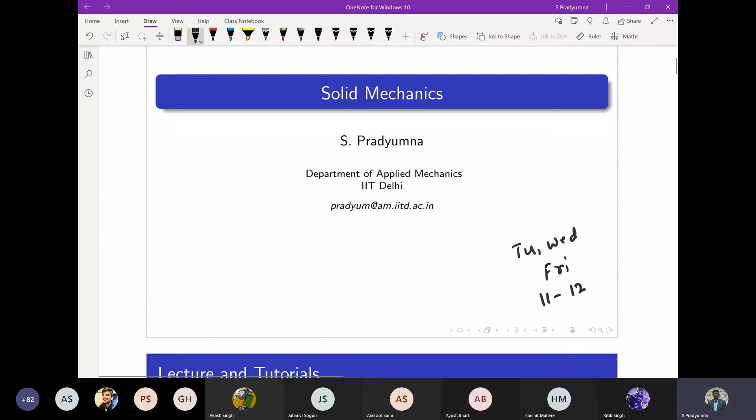Myself, Pradyumna from Department of Applied Mechanics, IIT Delhi. We'll have the lectures every Tuesday, Wednesday, Friday from 11 to 12 in the morning, right? And all the classes will be conducted in MS Teams, and the recorded videos of all the lectures and the lecture notes are also made available in the MS Teams app itself.

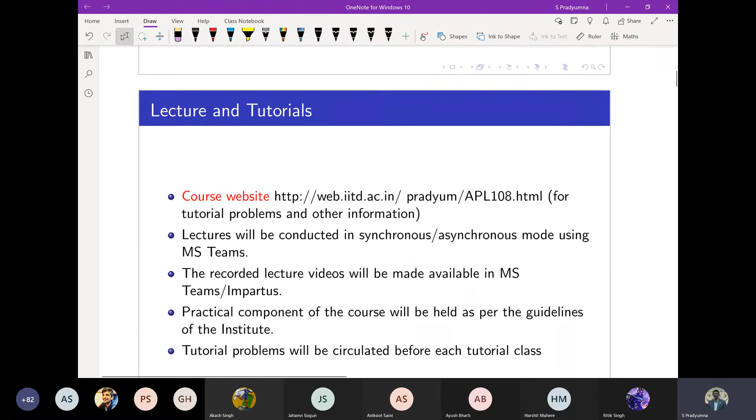Okay. So there is a course website in the Applied Mechanics department; go to my web page, or you can directly click this website for other information like how to get the tutorial problems and instructions regarding the course. It's already active right now. Also, you can access that. And moreover, I will be uploading these tutorial sheets and other instructions in MS Teams also directly. So you can access these tutorial sheets and any other material in MS Teams itself.

So as I told before, we conduct the lectures in either synchronous or asynchronous mode using MS Teams. When it is conducted in asynchronous mode, I will put the recorded video in the MS Teams app, and then we can have some live discussion sessions like problem solving or doubt clearing sessions if there are any doubts from you all coming in advance, so that we can discuss, and then you can ask any doubt you have. So we can conduct a live doubt clearing session if there is any need for such a session.

So the recorded videos will be available in MS Teams. Maybe Impartus can also, I can try. The practical component of the course, we have to discuss whether to go for online mode or wait for institute guidelines. And I will circulate all the tutorial problems for that particular week before each tutorial class, and they will be available either in my web page or in the MS Teams app. So these problems you need to solve, and then you can come back.

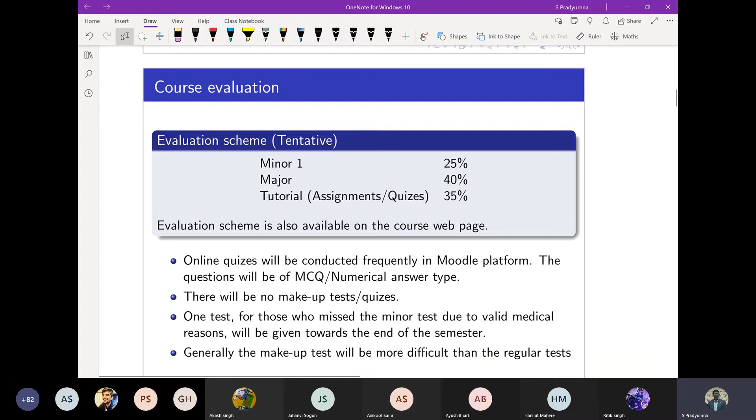I'll come to the course evaluation. In the course evaluation, this is the tentative scheme. We have one minor, and the weightage for that is 25%, and major has 40%. This has a tutorial component also. We have assignments or quizzes which carry about 35% weightage. Okay, we will have online quizzes very frequently in the Moodle platform. These quizzes may be every week or every alternate week. That depends on the topic. We'll conduct the quiz, or there may be surprise quizzes as well.

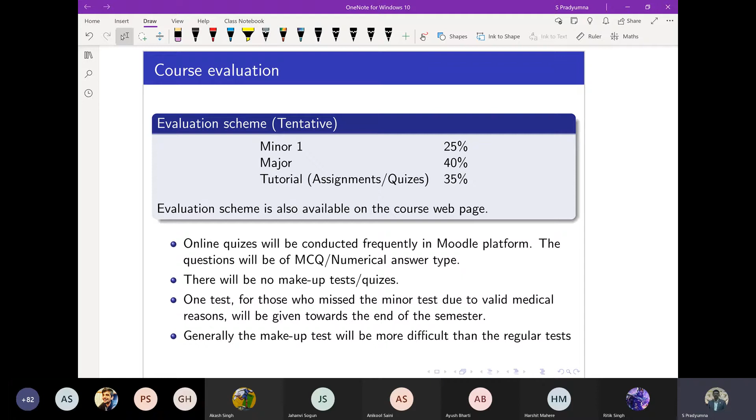So the type of questions in this quiz will be either MCQ or a small answer, like you just have to enter the number, numerical answer type question. So I assume that the data for different students will be different in this case. And there will be no makeup tests or quizzes. So if you miss a quiz, then you cannot have any makeup quiz. If you miss the minor test in case of any medical emergency or valid medical reason, there will be one makeup minor given towards the end of this semester. We usually have the whole syllabus for the makeup minor. Therefore, this test will be more difficult than the regular tests because the syllabus is huge, right?

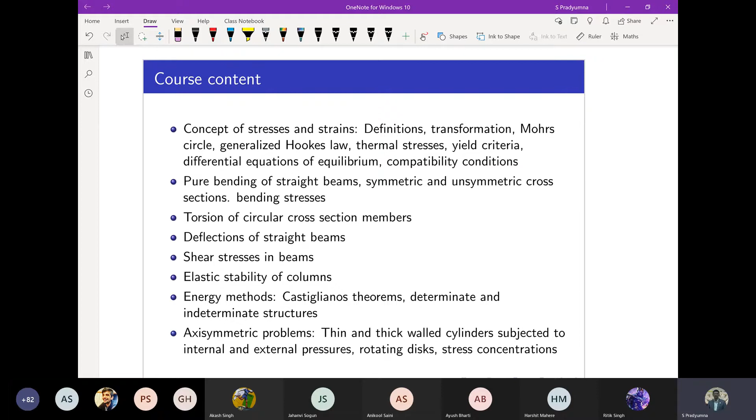I'll come to the course content. In the course content, we start with concept of stresses and strains, definitions, transformation of stress, Mohr's circle, generalized Hooke's law, thermal stresses, yield criteria, differential equation of equilibrium, and compatibility equations. Basically, we are discussing the behavior of any body or any material under different types of loading. Now, why do we study, what do we study in this course?

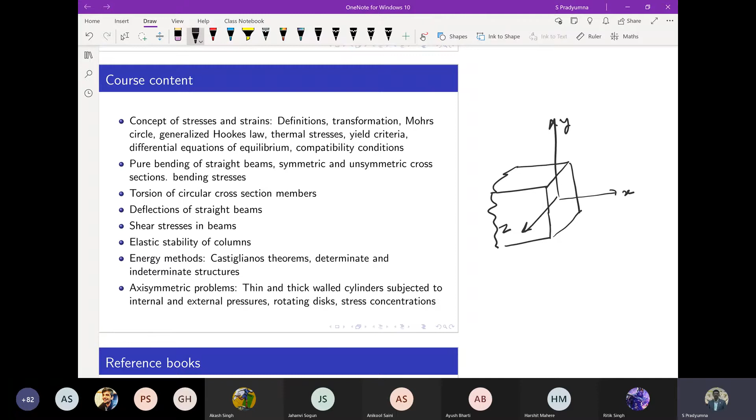To be told in brief, for example, let me consider a simple structure like this. You may assume it as a beam or any structural component. So let us assume that this is the x-axis, this is the y-axis, and this is the z-axis. Okay, and I apply a load like this at certain point P, and assume that this distance is B from here to here, and from here to here it is equal to A. Okay.

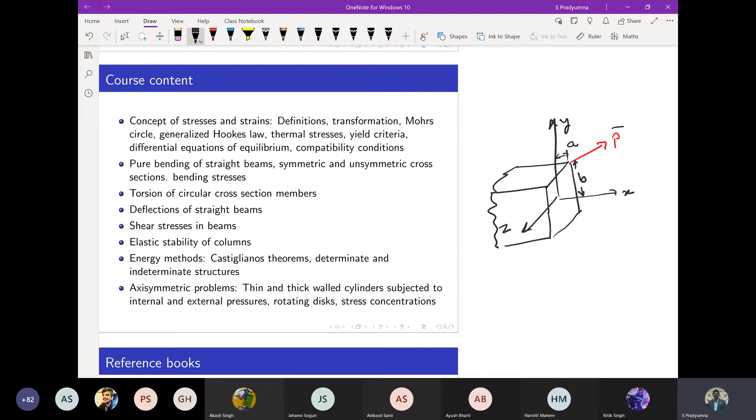So this load P, you can say it's a vector, and I want to know the effect of this load on the body. So what I can do is I can just consider that this load is transferred here. So with x component, that is Px, I can have Py, and I can have Pz. So I can shift this P to the centroid of this cross section.

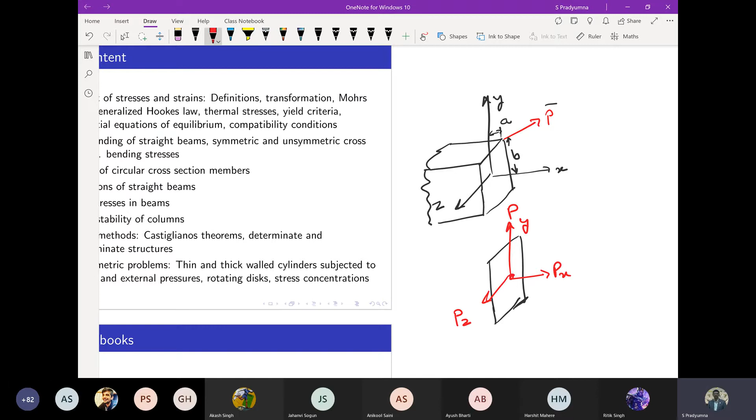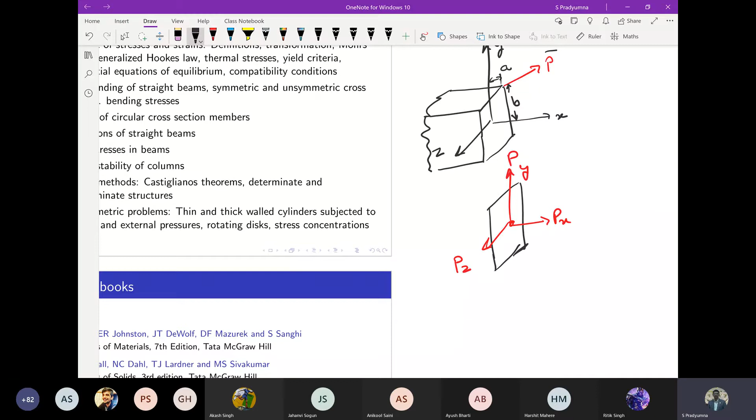Okay. So that's not the only way I can do it, right? I need to consider the effect of the moment also when I shift this. So there will be certain moments which I need to consider. So if I come to this x-axis, y-axis, and z-axis, I will have, for example, this is Mx, this is My, and this is Mz. So these moments actually create different actions in the body that I need to consider.

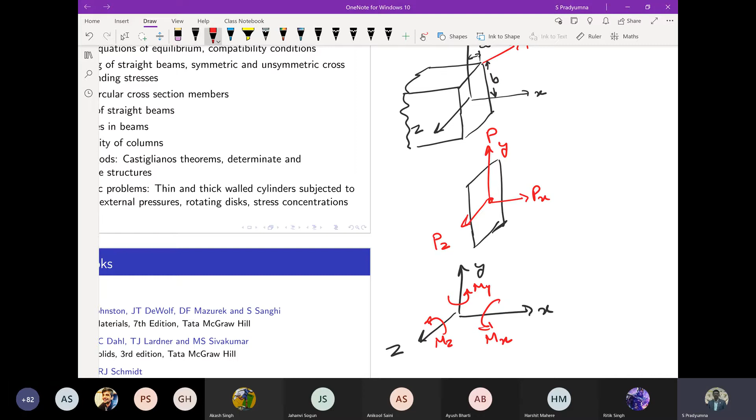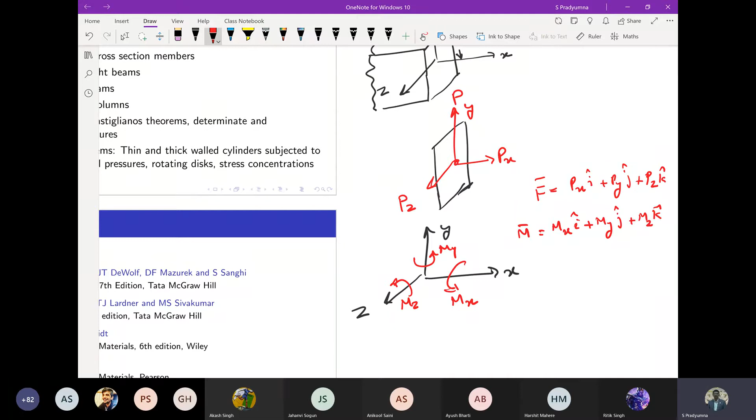So that means I have the force vector Px i, Py j, and Pz k, and the moment I have is Mx i plus My j plus Mz k. So in this case, if I assume that on the body I have a moment about this axis, I call it torsion. Anything which is a moment applied about the longitudinal axis of any structure, we call torsion.

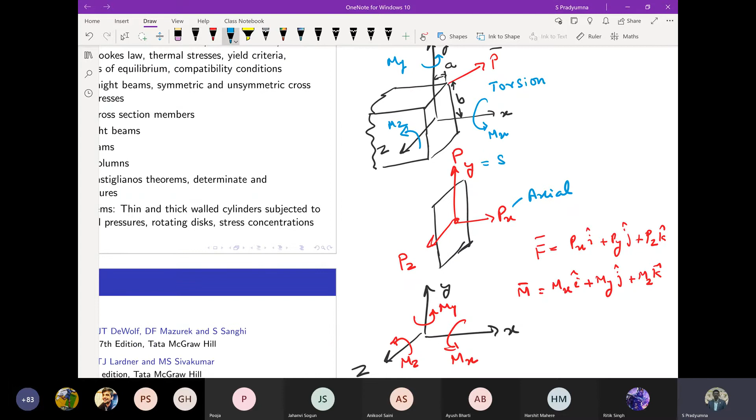Mx will create a torsion. Mz and My will create bending moment on the structural component that we are considering. So there will be bending action, there will be torsion, a twisting moment Mx, and there is axial force. This is axial force Px. There will be elongation of the body because of this longitudinally applied axial force, and these are the shear forces, Py and Pz.

So there are different actions either acting independently or in combination with each other. These are the combination of forces which we need to consider in this problem. There is torsion, bending, shear, and axial force. If this force Px is compressive, then it's compressing the body, and it may be creating buckling or some stability problem also. If you just compress something, it may crush, it may buckle, it may fail, anything may happen.

So we need to understand the action of these kinds of forces. We are considering what happens when a body is subjected to different actions of forces. We are interested in finding out the distribution of stress and the deformation because of this action. If there is torsion, there is a twist, which we call the angle of twist. There may be elongation, compression, displacement because of bending. These are the different aspects we are interested in finding out.

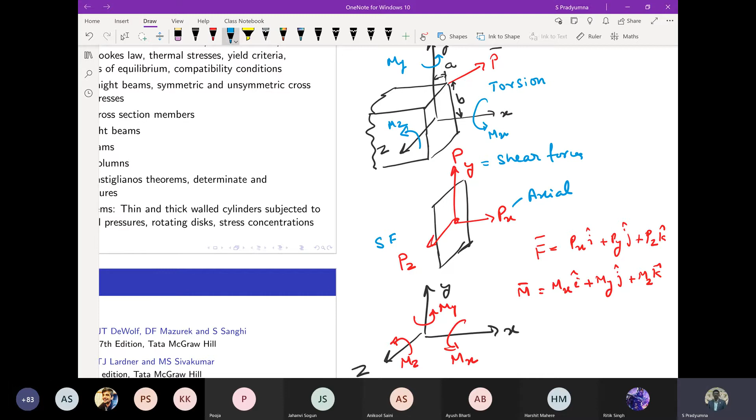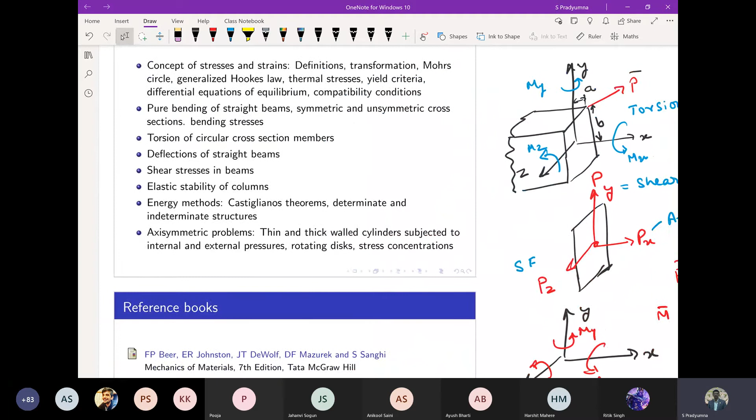Okay, so we need to understand this kind of behavior when we want to design any component which could be subjected to these types of forces. I can reduce this force into shear, axial, bending moment, and then do the analysis. That's what we do in this course. In the course content, we discuss the concept of stress. Why do we require stress? What are the definitions? We will learn this in detail.

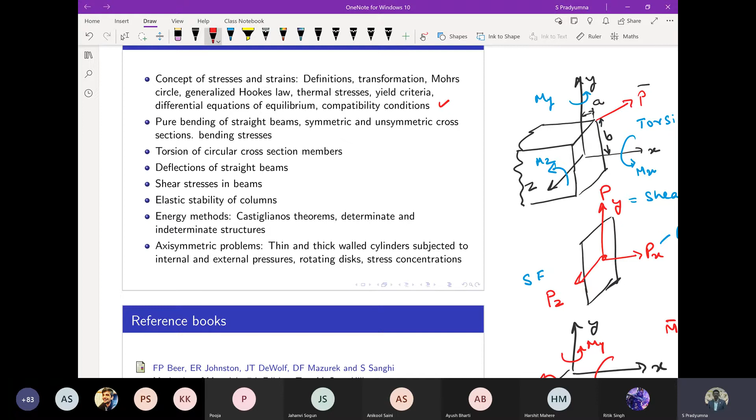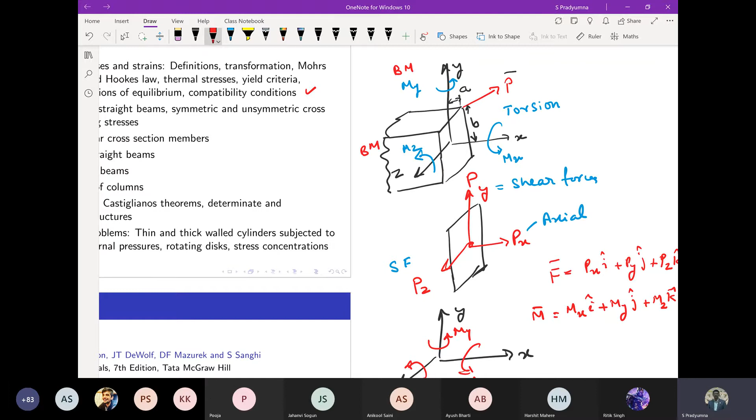Pure bending of straight beams, symmetric and unsymmetric cross sections, bending stresses. As I said before, we have bending moments: this is bending moment My, this is bending moment Mz. What happens when you have a bending moment, how the stresses vary across the cross section of the beam, we can study that. We'll discuss what pure bending is and what symmetric and unsymmetric bending are later.

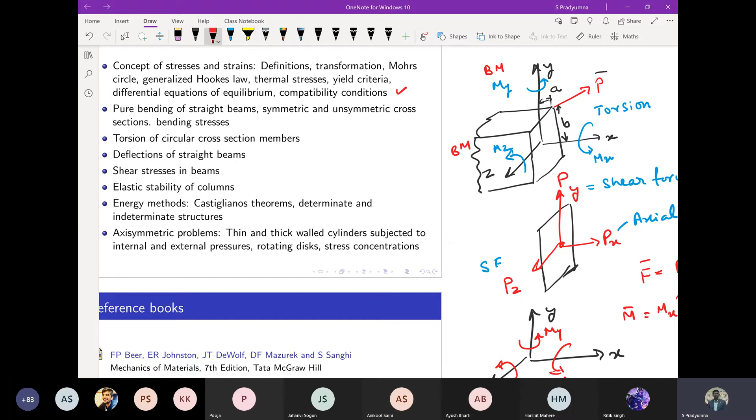Torsion of circular cross sections. The torsion is because of the twisting moment Mx acting about the longitudinal axis of the body. Because of these forces, there will be deflection, which we study for straight beams, and for curved beams as well later. And because of the shear forces Py and Pz, shear stresses could develop in the beams. The variation of the shear stresses we study later.

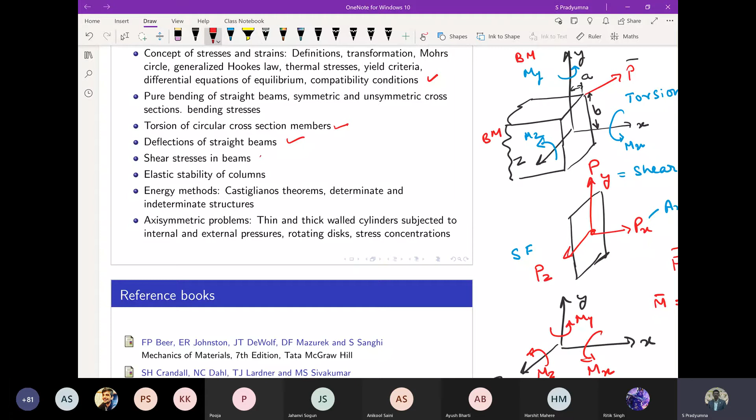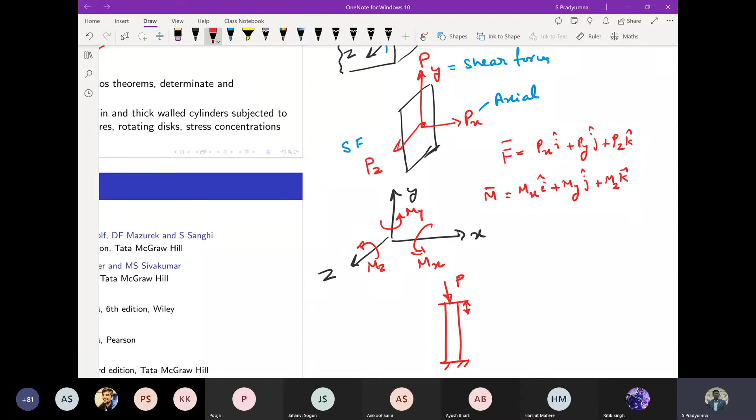Elastic stability of columns. When I have a column like this subjected to, let's say, compressive force P, it will undergo axial compression. If you keep on increasing this load P, the column may buckle. That is a stability problem, which we study in the elastic stability of columns.

And then there are some energy methods which actually help in finding out the displacement and reaction forces in determinate as well as indeterminate structures.

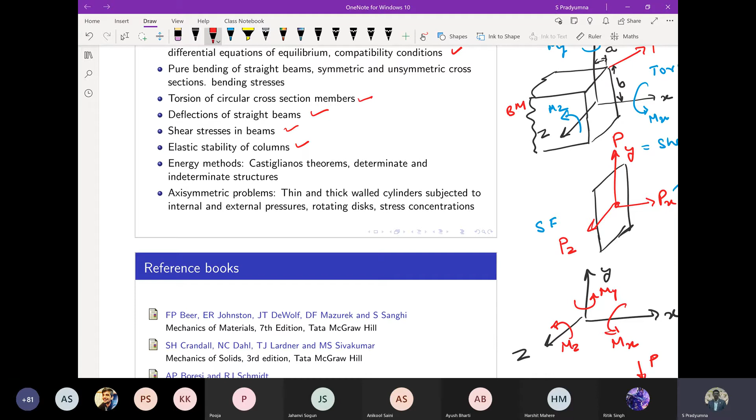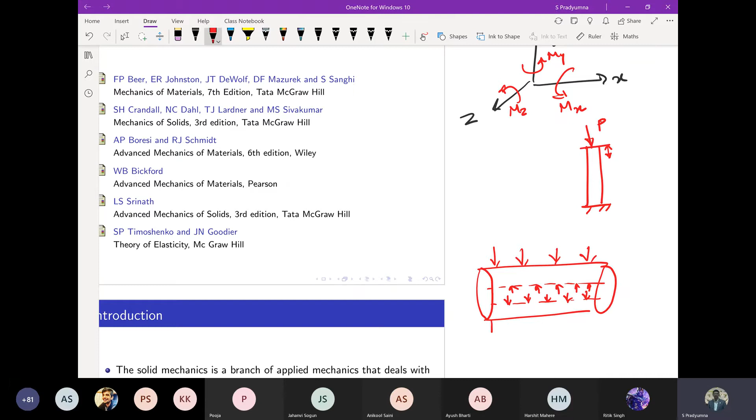And finally we go for the axisymmetric problem, where we consider thin and thick walled cylinders subjected to internal and external pressures. For example, I have a pipe like this, which is subjected to some kind of internal pressure. Maybe it is carrying a fluid, and if it is buried, then you also get external pressure.

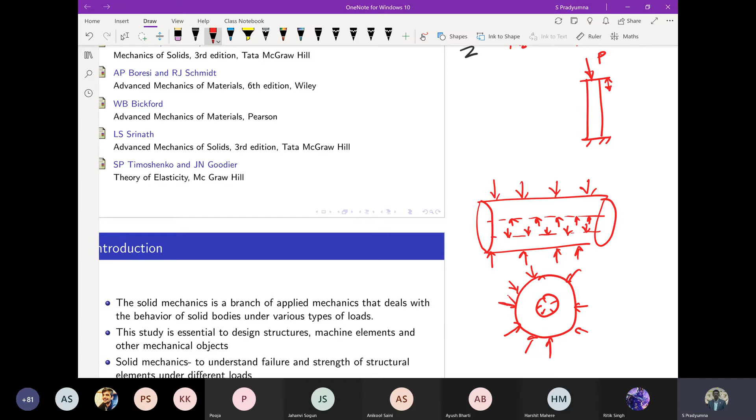So this we have to investigate. These are the type of problems we are looking at in this course - what type of stress, how the stress distribution acts on this body, and so on. This is essential in case of designing the components.

And for this we also go through yield criteria, which is the different criteria required to establish or understand the failure behavior of components under different loading actions. So this essentially is what we learn in this course, APL 108 on solid mechanics. You can call it strength of materials or mechanics of solids - this is the total content of the course.

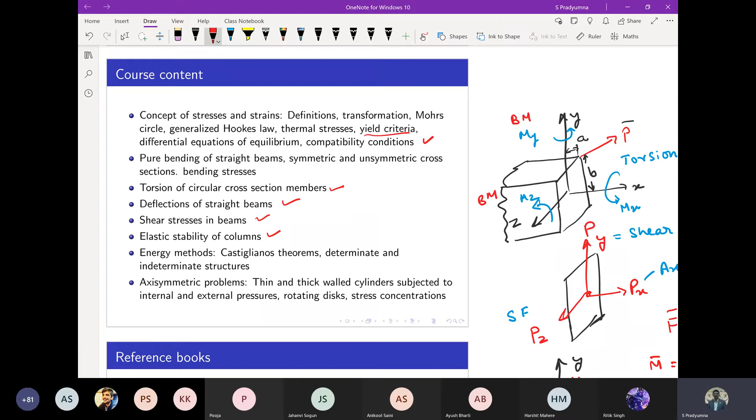So if you have any question on this content, you can ask me.

These are the reference books I follow for this course for different topics.

So initially we start with this book, and this book for the first topic, that is on the stresses, stress transformation, and so on.

For yield criteria, I take the help of this book by L.S. Srinath.

So these are the three books we generally follow right now, and for some example problems and tutorial problems, we take some topics from the Beer Johnston book. So these four are the important books required for this course. Is there any question?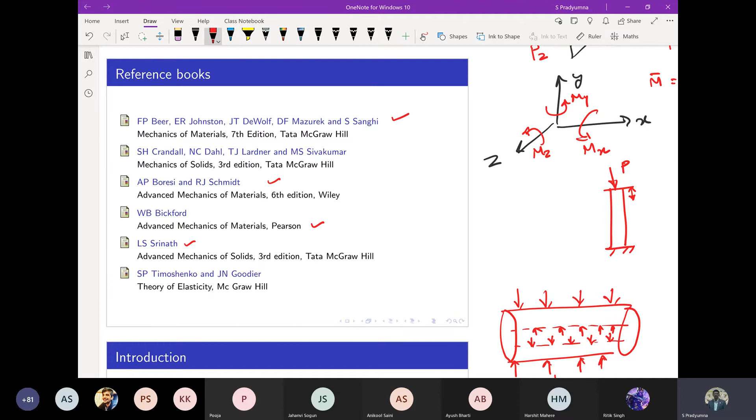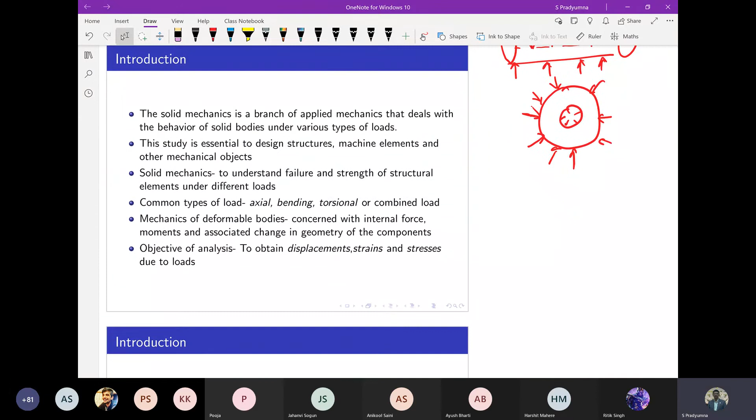Okay, so what is solid mechanics and why do we need to study it? There is a difference between the engineering mechanics you learned in the previous semester and solid mechanics. Solid mechanics is a branch of applied mechanics that deals with the behavior of solid bodies under various types of loads.

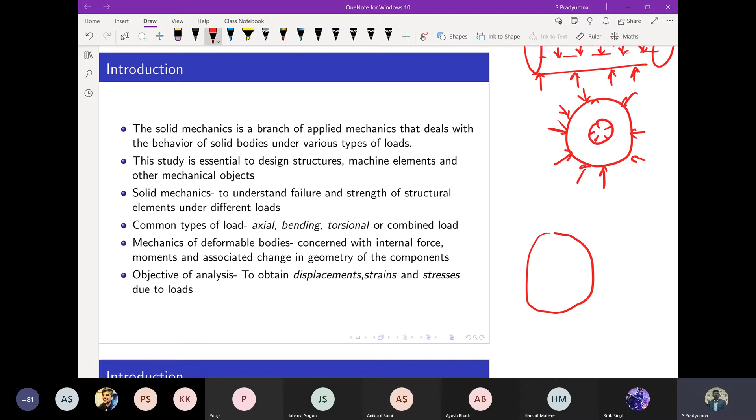The difference between engineering mechanics and solid mechanics is that in engineering mechanics you assume the body is rigid. For example, if I take this body, when it is deformed because of different loads, it may deform like this, or it may deform something else. Let me erase this. It may deform something like this - this is the deformed shape. Now how do I say it's a deformed body or a rigid body?

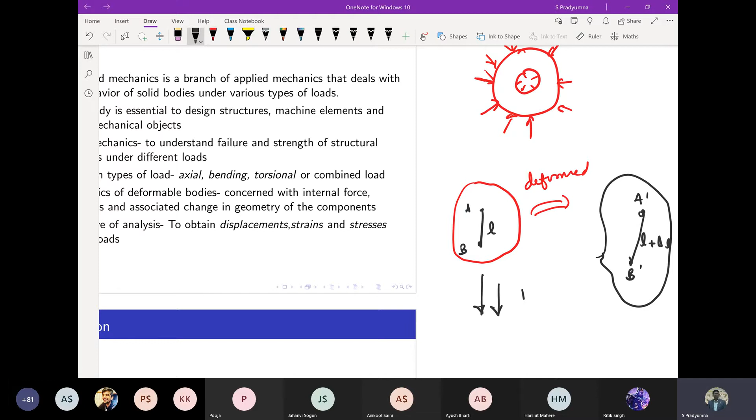If I take 2 points, point A and point B, the length of this line AB - if it changes to A dash, B dash, and if it is different from this L, maybe it becomes L plus some delta L, then you say it's a deformed body. If it remains as it is, just moves to some other location - just a translation - it goes to some other point and L remains the same, this is actually a rigid body. Or it can be a rotation also - when you just rotate this body, AB remains as it is, it's just a rigid body translation or rigid body rotation.

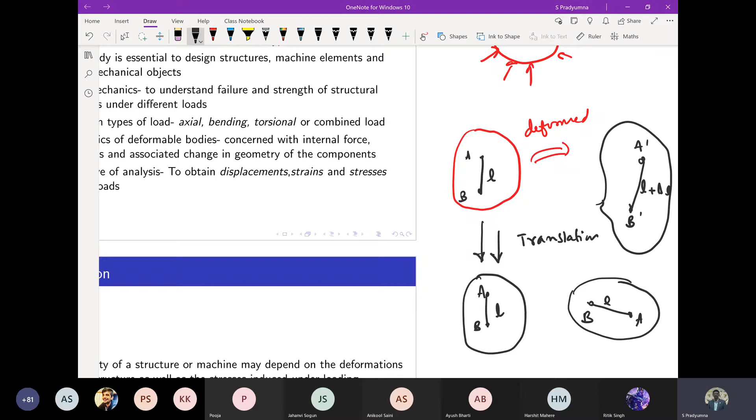So this is what we studied in engineering mechanics. But in this case, we need to consider the deformation because of the different loads applied on the body. This study is required to understand how this behaves under different types of loads. The deformation, displacements, internal forces, internal reactions, and strain are all required - this is essential to conduct the design of structures, machine elements, or any kind of mechanical objects where we apply the type of load discussed before.

So now we need to understand the failure and strength criteria of these elements under different loads - how much load it can sustain, how much displacement is safe, and so on. We have different types of load like axial load, bending load, torsion, or a combination of any of these. So we are concerned with the internal forces, bending moments, and what happens with respect to the geometry because of the force we have applied.

So that means the associated change in geometry of these components. So why do we want to do the analysis? To obtain the displacement, strain, stresses due to loads. So why do we need these kind of things? It's required to carry out the design of any structure.

We want to know, for example, if you want to design a simple rod, which can take, for example, push-ups on that rod, right? So how much strength it can take, how much load it can take, how much displacement you are allowing for that. So these are actually required in that case, right?

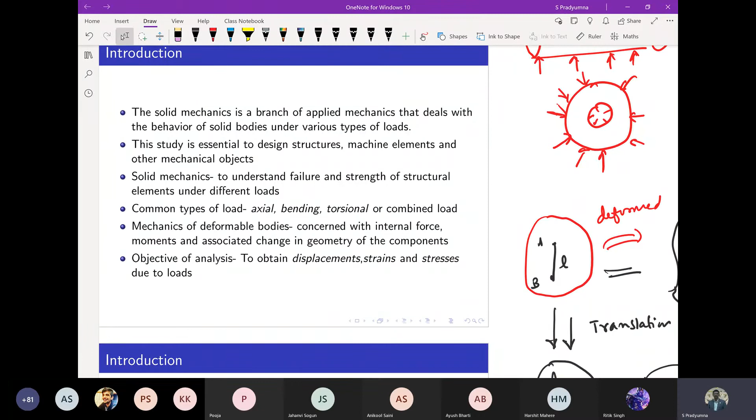So that means the magnitude of the load or the magnitude of the displacement may not be a correct criteria in order to understand the behavior or to carry out the design. I cannot just say apply 10 kg load, it will be okay, just apply 100 Newton, it will be okay. I cannot say that unless I know the stress strain behavior of the structure, the internal reaction, how much load the type of material takes. These are the details I require.

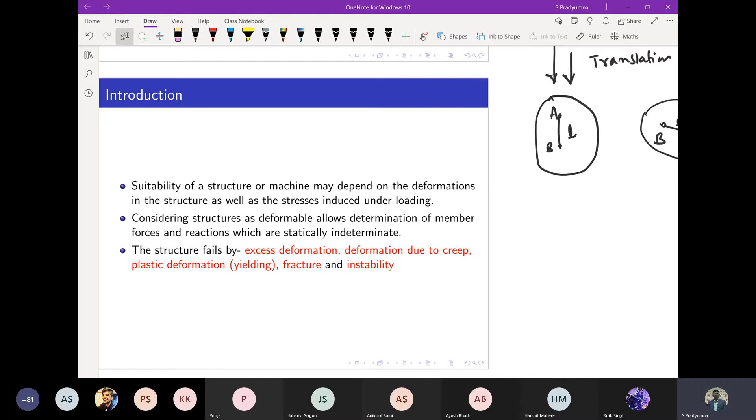That's what I'm saying, that the suitability of a structure or machine depends on the deformations as well as the stresses induced under loading. So not only the load, but what is the stress internally, how it behaves, how the reaction is there, how internally the applied force is resisted. So these are the type of details we are looking for, right?

So considering the structures as deformable allows us to determine the member forces and reactions which are statically indeterminate, right? So if you consider the structure is undergoing some kind of deformation, then the structure is not a determinate structure. So with the help of your mechanics knowledge alone, you cannot understand what is the stress, what is the kind of deformation it is undergoing.

So it's not possible to say what type of failure will create what type of deformation. For example, if it is undergoing a lot of displacement, if you take a rubber and keep on stretching it, it will undergo large deformation in the axial direction, large extension, and then it breaks suddenly, right? So every material will not behave in the similar manner.

There may be deformation due to creep. A smaller load you keep on applying for a longer duration, because of the creep, there will be large strain. So this you have to understand. There will be plastic deformation, there will be fracture, there will be instability. There are different modes of failure.

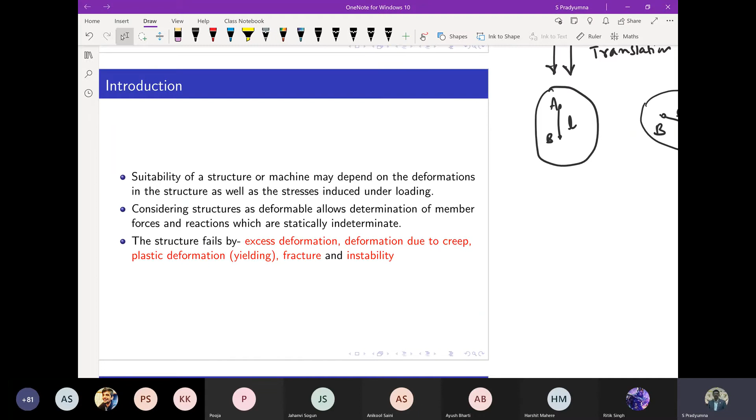To understand each type of failure, we have to understand the stress strain behavior of this material. That is what we call the constitutive behavior of the material that we should understand. That is helpful in understanding the behavior of the material. So basically we are considering the elastic material. By definition, elasticity is the property by which a body returns to its original configuration after you remove the load.

Now I can just apply, this is the variation, let's say I keep on applying in this direction, so the stress strain curve goes like this. And if I remove the load, it comes back to the original position in the same path. So it's an elastic material, right? And there is no strain after you remove the load, up to a certain limit.

This may not be true for all types of loading and all magnitudes. So you keep on increasing the load stress, then there will be change in the strain. If you remove that particular load, it comes back to its original position, so that means the material is elastic. Now, in figure B, let's say I apply the load like this, then it is not going back to its original configuration because of excessive strain. There is some strain which is actually remaining in the material itself.

When I remove the load, it comes back to zero stress like this, but there is some kind of strain which remains permanently in the material. We call this plastic deformation, so there is plastic strain because of that. Then if you again start increasing the load, it goes in another direction, and this keeps on happening. So it comes back to its original position, but there may be some strain left.

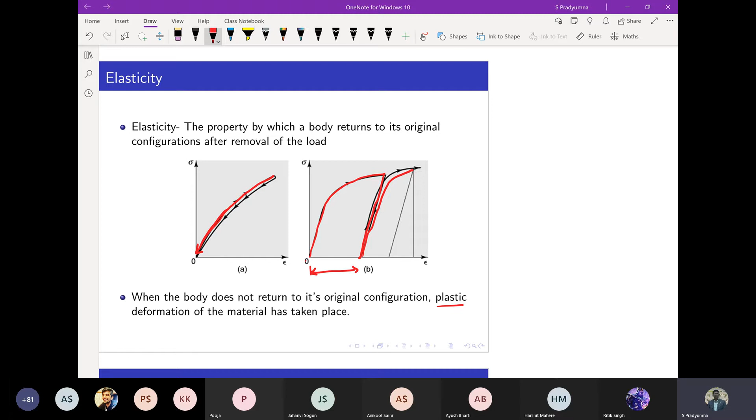For example, if I take a rubber and stretch it too much and then leave it, there will be some kind of strain, some change in the length of that particular rubber specimen I used. So these are the concepts of elasticity and plasticity which we have to understand.

There are different materials called rigid material, linearly elastic material, rigid plastic material, and so on. What happens if I take a rigid material?

For example, if I consider a piece of chalk and apply an axial load, pulling it from two directions, what happens is that there is zero strain because for smaller loads there is no extension, or negligible extension. If I keep applying a large enough force, there will be breakage of the material. There may be large stress, but there is no strain because it just breaks. If it breaks, there is no strain—it suddenly breaks, and you don't know when it is going to break. At a certain magnitude of the pull, it will break.

In the linear elastic material, as I said before, as you keep applying the load, the strain is linearly proportional to the stress—stress is linearly proportional to strain. This is the definition of Hooke's law, up to the elastic limit.

In a perfectly plastic material, as you keep applying the load and increase the intensity, the stress increases, and suddenly there is a permanent deformation—a permanent strain, a large strain after that. So we call this a perfectly plastic material. Initially it is rigid, and then suddenly the plastic behavior starts. Plastic behavior means the state of strain is not reverted back to its original configuration when you remove the load you applied.

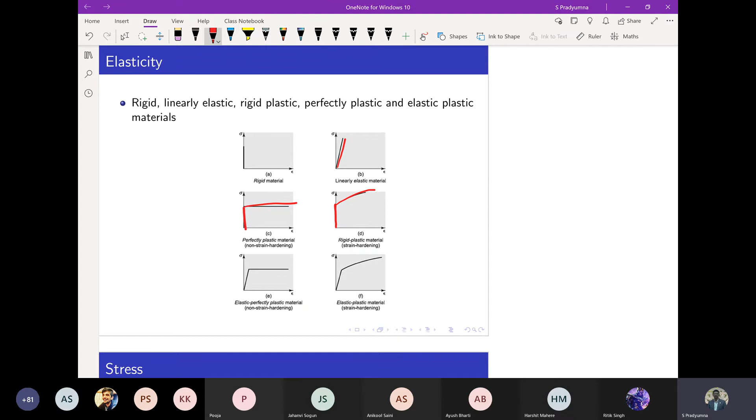There is also a rigid plastic material. Initially it's rigid up to a point, then as you keep increasing the stress, there is plastic deformation, but it's not perfectly plastic—it's rigid plastic, where there is strain hardening taking place. Each of these behaviors we should understand in detail; we'll do that later.

And there is elastic and perfectly plastic material—this is a mix where I can use the linear elastic model, and then there is a large strain because of the plastic behavior of the material. So these are the different combinations of material properties.

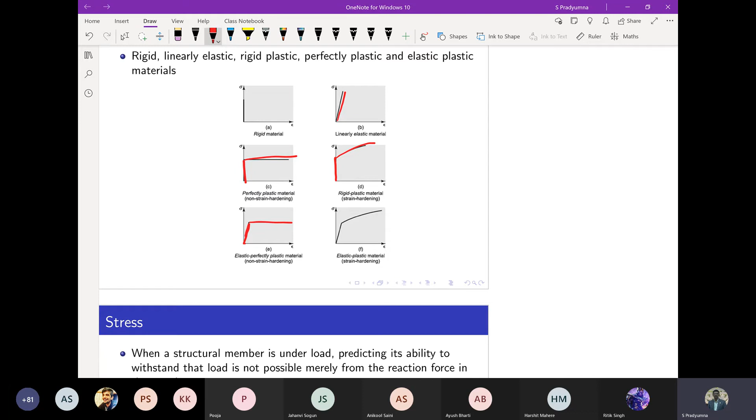There is another elastic plastic material where there is strain hardening, and there is non-strain hardening. In strain hardening, the strain is increasing and the stress is also increasing. In non-strain hardening, the strain just increases without change in the stress—for the same amount of stress applied, the strain keeps increasing rapidly. In strain hardening, there is an interaction between stress and strain—that's the meaning of this.

Now I come to the state of stress. So I said that the load is not a parameter, and the displacement is also not a parameter in carrying out the design or to understand the behavior of the material. When a structural member is under any type of load, you cannot predict its ability to withstand that load.

So whether it takes 10 kilonewton load or 100 kilonewton load, for that material we don't know. It's not possible just by considering the reaction force. The reaction force is actually calculated by considering the body as a rigid body, and then you conduct the analysis to find out the reaction forces. You do not consider the internal deformations when you find out the reaction forces. Did you consider that in mechanics when you were calculating reaction forces, drawing the shear force bending moment diagram? You did not do that, right? So it's not possible just by the prediction of any reaction force, because that just comes from rigid body mechanics.

Let's consider this body. This is subjected to different forces acting on the body. P1, P2, P3, P4 are the point forces, and this P is the distributed force. Let's assume that this is fixed to some point, otherwise it's just a rigid body translation or rigid body motion. Now this body is subjected to so many forces. I take a section like this. This is portion 1 and this is portion 2. If I cut this body, this is portion 1.

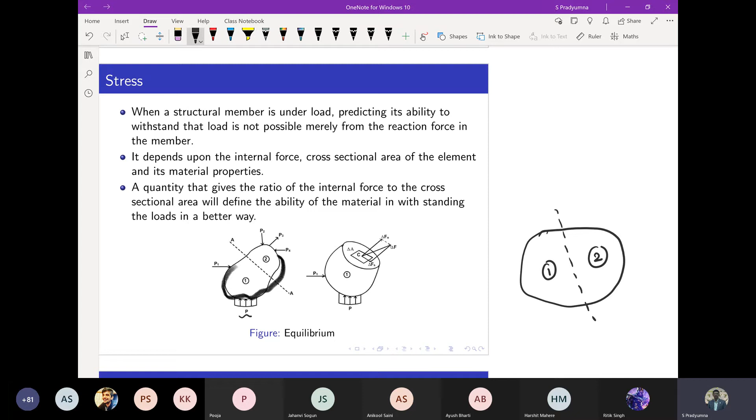Now what happens is that at this point, let's say I assume a delta A, a small area. There are lots of forces acting on this. This is actually the force exerted by body 1 onto body 2, onto the other surface. The other surface, this is from body 2. So this also will have an equal and opposite interaction, that is from Newton's law, equal and opposite reaction. Now this is actually a distributed force on this area.

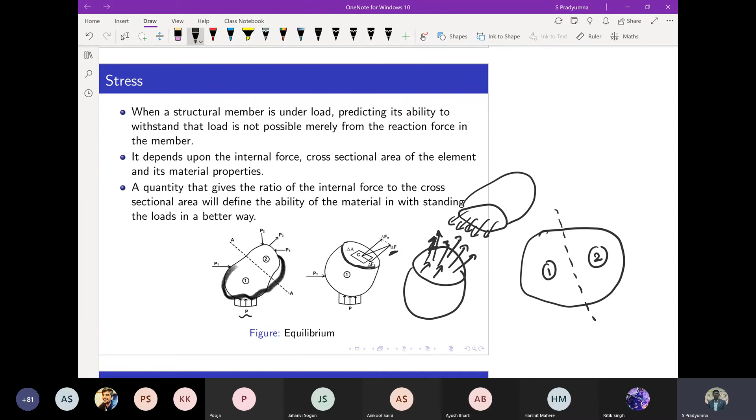Now I want to consider a small area delta A on which I have forces acting on this body. So delta F is what I consider as the resultant of the forces. So here delta F is the resultant force acting on that particular area delta A.

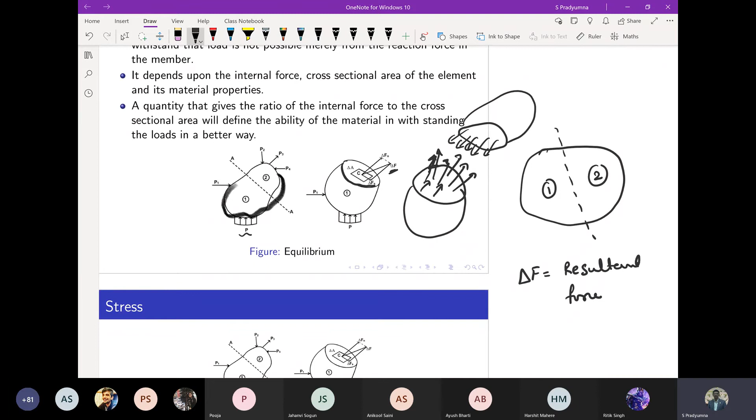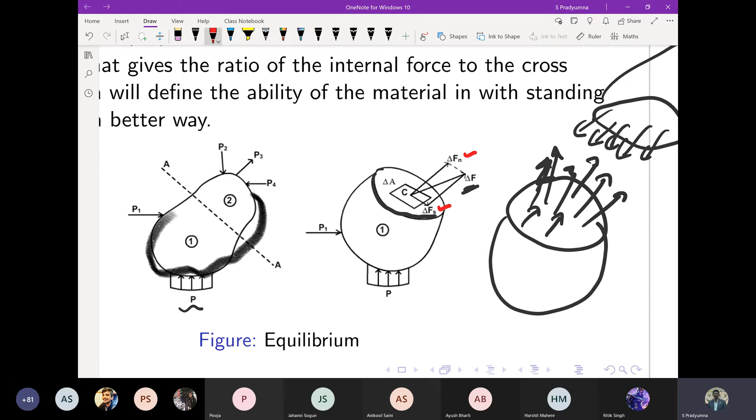Now I can also say that there is delta Fn, this one. This is actually normal to the surface we have considered, and this delta Fs is tangential to the surface. So normal and tangential components of these forces, that is when you resolve this delta F, the resultant force, into the normal and tangential components, that is delta Fn and delta Fs. So this is the resultant force acting on that particular point C.

Now let's say at point C I want to know the intensity of that force. So I just limit the delta A to 0 like this. So this delta F is the resultant, and if I limit this delta A to 0, I get this is the stress sigma. The force divided by the area is actually stress. If I limit this delta A to 0, we call this the stress at a point.

There may be different number of components of stress. That's a different issue, and we will do that later. So sigma is the stress at a point when I limit the delta A to 0. Are you understanding? So this is also called a term which we call it as

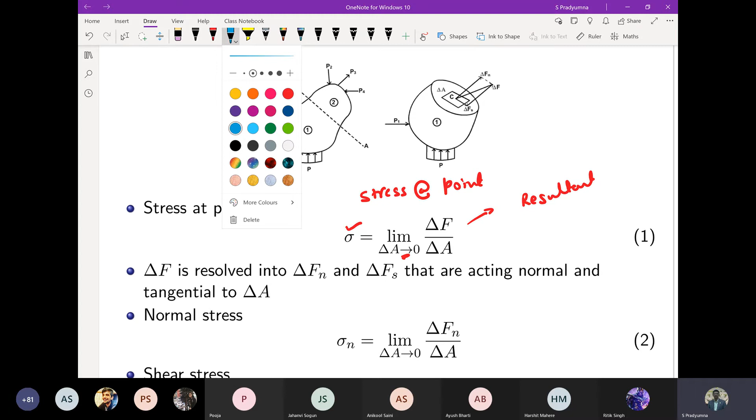traction. This we call it as a traction, this is a traction force. So delta F is a traction force, and sigma is actually the stress at a point, because this may not be acting normal to the surface. It depends on the intensity of forces, the direction of the applied forces, and so on. So this delta F is actually the traction. This may not, in general, be normal to the surface.

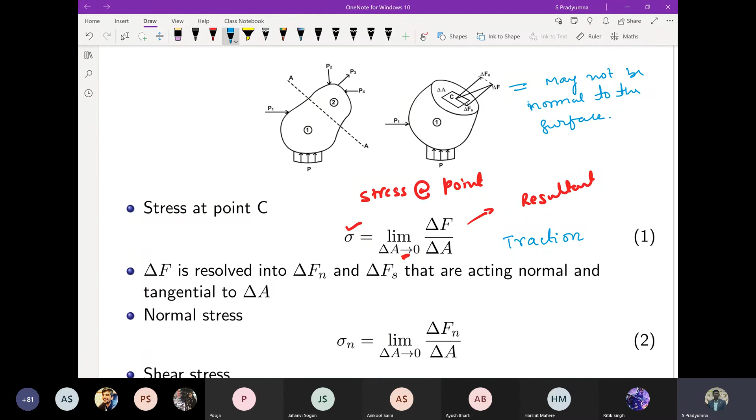So the normal component is delta Fn, and that is what we call delta F. The traction force is resolved into the normal component delta Fn and the tangential component delta Fs, acting normal and tangential to delta A. So if I want to get the normal stress at that particular point, sigma n, I take delta Fn divided by delta A, and put the limit on delta A to 0. So this is what we call normal stress, acting normal to the surface we are considering.

There is also a shear stress, which is because of the force acting tangential to the area delta A. So this is the shear stress, sigma s. These are the two components acting at that particular point. Then you can consider different orientations and so on.

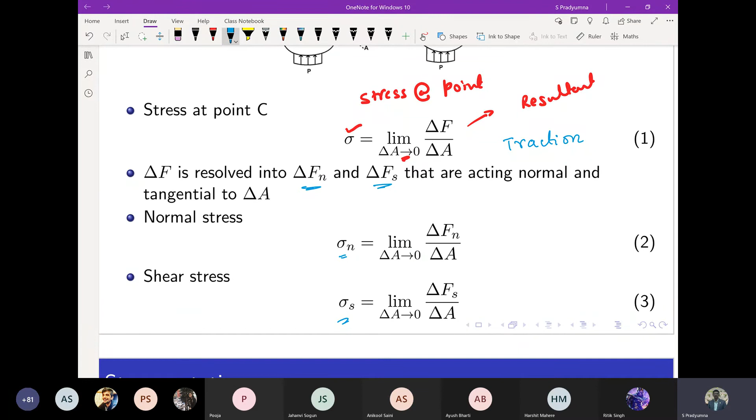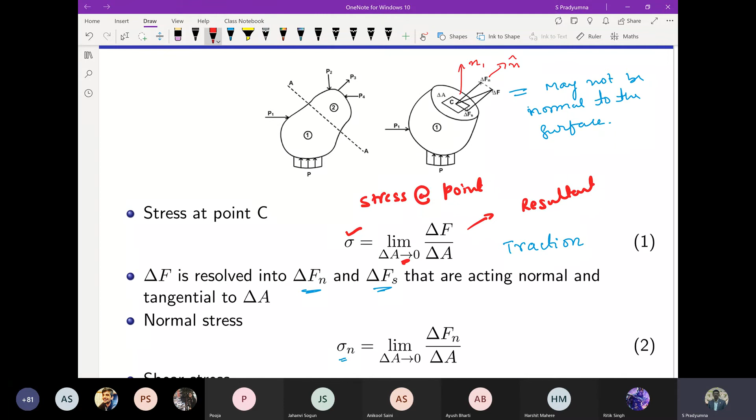Now the question is, if I change this plane to some other plane, instead of considering this n cap direction as the unit vector normal to the surface we are considering, if I take another n1 cap as the unit normal, then what happens? Will this sigma n and sigma s be the same, or will they be different? Are you getting the point?

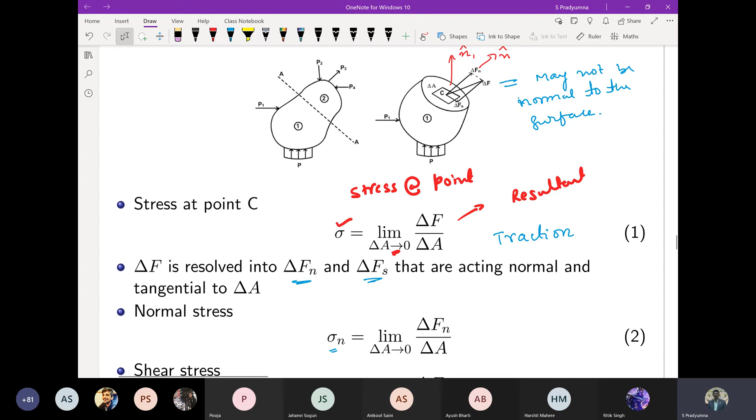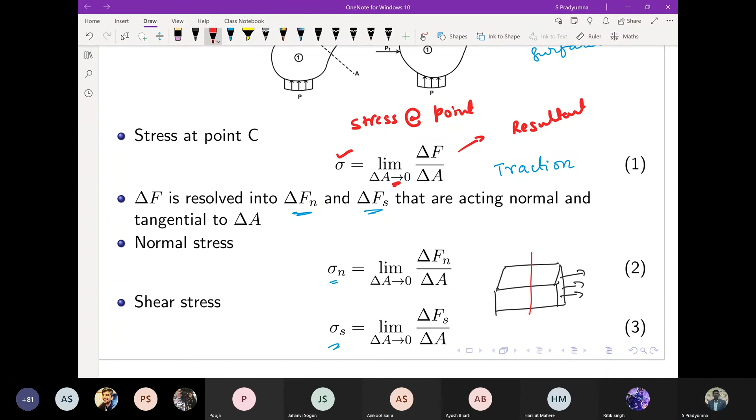So for example, if this is the body, and these are the forces we are applying, now let's say I consider this section. So that means this is the kind of thing we are looking at. This is the normal stress, and this is the n. Now let's say I take the section in a different orientation, like this.

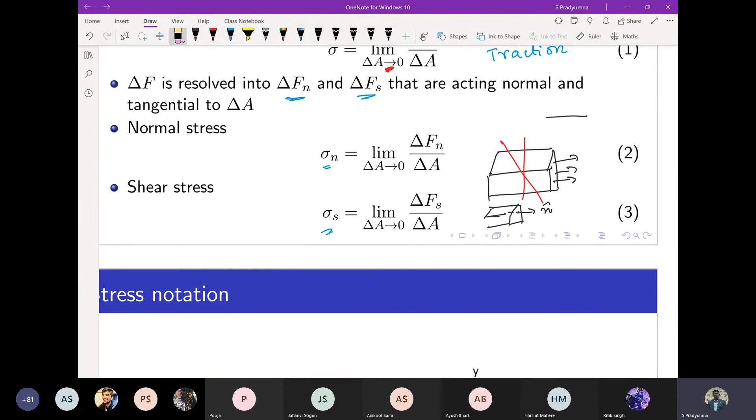Now what happens? Whatever I'm assuming here becomes like this. Now this is the normal. So will this intensity of sigma n here and sigma n1 here be the same? No, sir. Why? Because different components of F will be there.

Yes, correct. So that means this stress, normal stress or shear stress, depends on two things: one is the direction of the normal, the direction on which the stress is acting, and another is the direction of the stress itself. You're familiar with scalars and vectors, where a vector has a magnitude and a direction. Here it depends on two things: the direction of the stress itself, and the direction of the normal, on which plane it is acting, and what is the direction of that plane. So if you change any of this, the whole sigma will be different.

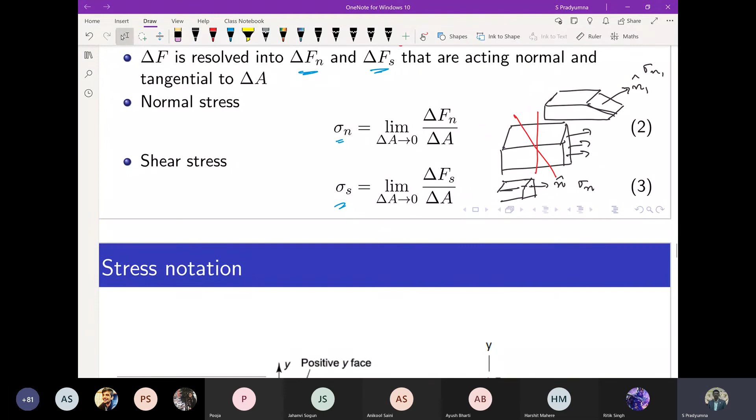Therefore, we call the stress component a tensor. That means it depends on the normal to the plane and the direction of the stress, or the direction of the resultant force. So therefore it's a tensor. Any change in the normal direction or the direction of the force itself will change the tensor. So that means it depends on two directions: one is the direction of the stress, another is the direction of the normal.

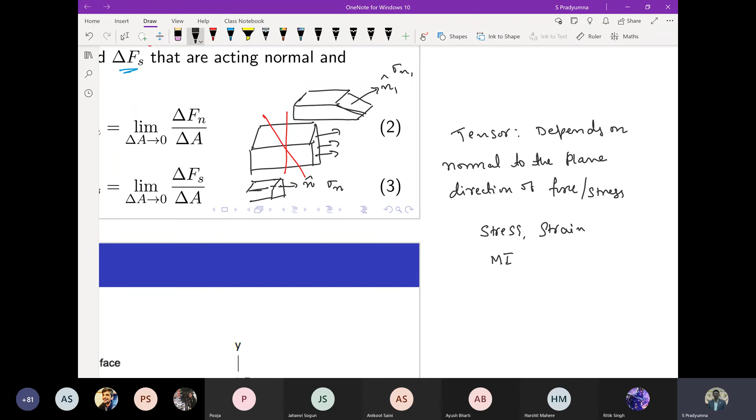If you change any of this, the whole parameter will change. Examples of a tensor are stress, strain, and the moment of inertia, mass moment of inertia, or area moment of inertia. These are examples of tensors. If you change any one of these, the whole parameter or component will change. So that is the stress parameter.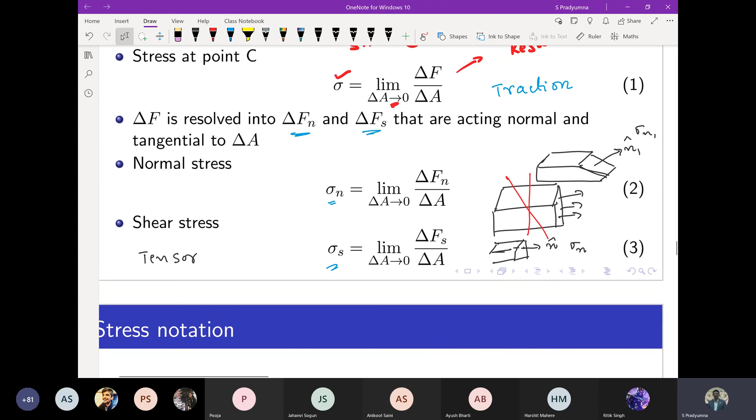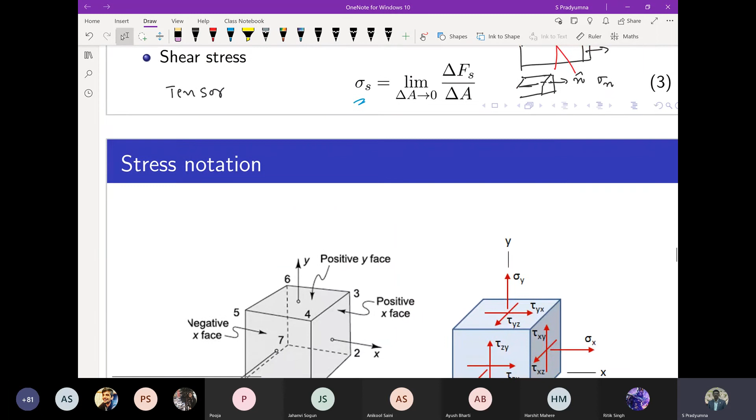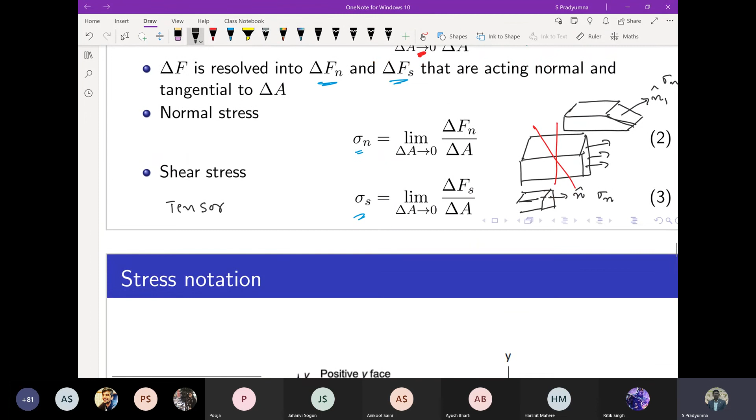So we want to understand more about how many components of stress there are, and how to generate the type of stress we are looking at. We can discuss that when we consider the stress notation. At a particular point, as I said, I get two components: one normal to that, another shear, tangential to that.

So if I go to a three-dimensional body like this, I have the normal, which is this one. There is no ambiguity in understanding this. But if you consider the tangential direction, there will be two components, if I consider the Cartesian coordinate system. Tau is the shear stress: one tangential to the surface along the x direction, one tangential to the plane along the z direction. So there may be three components of stress, one normal and two shear components, on any particular plane.

If you take a 3D cube like this, then what happens? You have 9 components of stress.

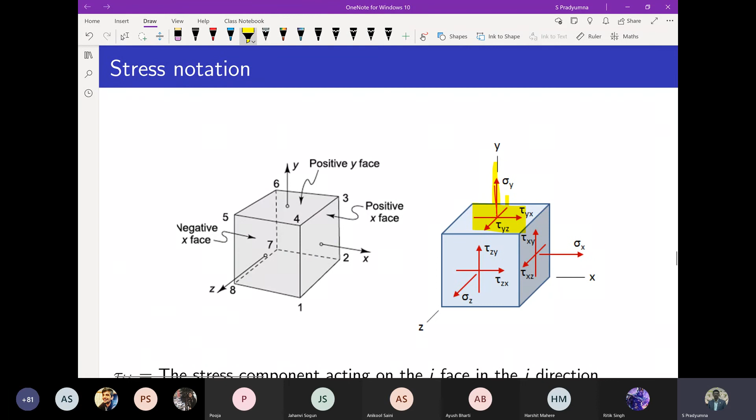Acting on x direction, y direction, z direction, normal stresses, and there are shear stresses. So we need to understand how you write the components of stress, how to get the positive stress, how to get the negative stress and all. So we have to understand the component of stress, what is the meaning of, for example, tau xy or tau ij in general. If I say tau ij, that means the stress component acting on the i face in

the jth direction. i face means having normal along i direction. That is the i face, we mean to say. So if I look at tau xy, the first subscript x denotes that it is acting on a plane having x direction as the normal, and it is acting in the jth direction, in the y direction.

Similarly, if I look at tau zx here, it is acting on a plane that has the normal along the z direction, and the stress itself is acting along the x direction. So that is the meaning of that. Tau xy means x denotes the direction of the normal to the face, and y denotes the direction in which the stress component is acting. So this is our understanding.

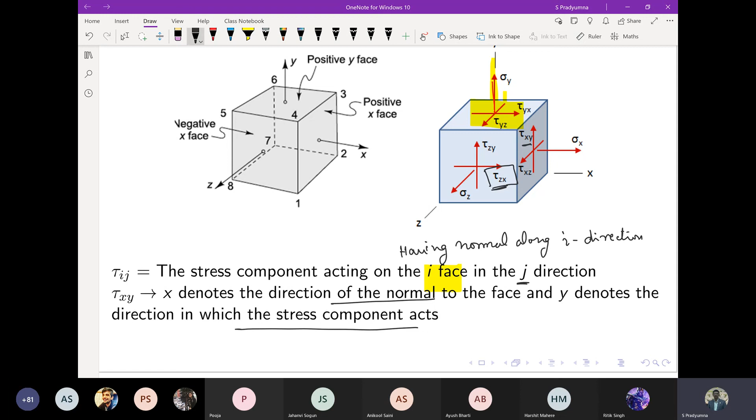For example, sigma x, sigma y, sigma z, these are the stress components. You can also write it as sigma xx. That means x is the direction of the normal, x is the direction of the stress. ij you can also write when i is equal to j, with the same definition. The stress is acting along the x direction, and the normal is also along the x direction. When these are the same, you call it a normal stress. When i is not equal to j, xy, xz, yz, zy, they are called shear stresses.

So there are three components of normal stress: sigma x, sigma y, sigma z, and there are six components of shear stress. They are tau xy, tau yx, tau xz, tau zx, tau yz, and tau zy. These are the six components of shear stress, and three components of normal stress are sigma x, sigma y, and sigma z. So there are 9 components, but we can reduce this to 6 by considering the symmetry of the shear stresses, which we can discuss later.

And there is one more thing we have to discuss, that is the sign convention of the stress. That we can take up in the next lecture. Okay. So any doubt or any questions you want to ask, you are free to do that. Any questions on this?

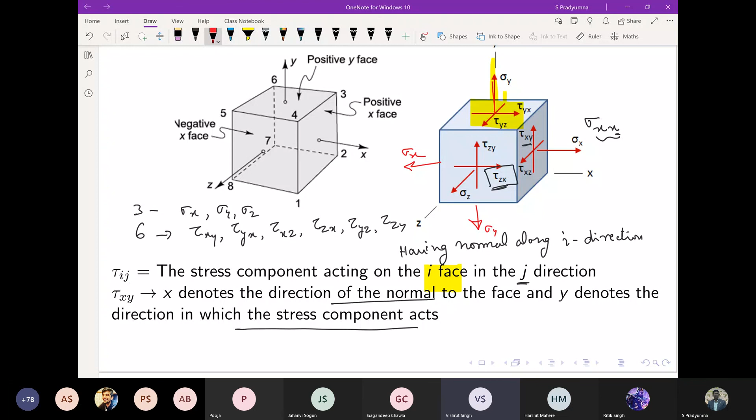Excuse me, sir. Yeah. So in the stress formula we wrote above, we took delta F upon delta A. Yes. So are vectors being considered in this formula? No, we are considering that delta F is the resultant force. Yes, sir. So that means we have a prescribed or already known direction of delta F? That is the resultant of the force. The only thing we know is N, the normal direction.

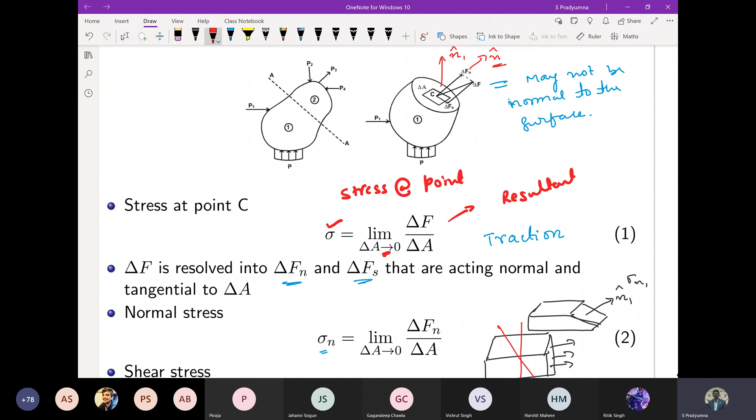Okay, sir. So in that case, you may know this, but right now we are not getting into that, because we are only worried that delta F is the resultant force, or we call it a traction force, and then we want to find out the stress at that point. Yes, we know the direction of the traction, or delta F, but that depends on the external applied forces, right? Yes, sir. That we can find out. So it's nothing like the vectors are being divided, right? No, no. Okay, sir.